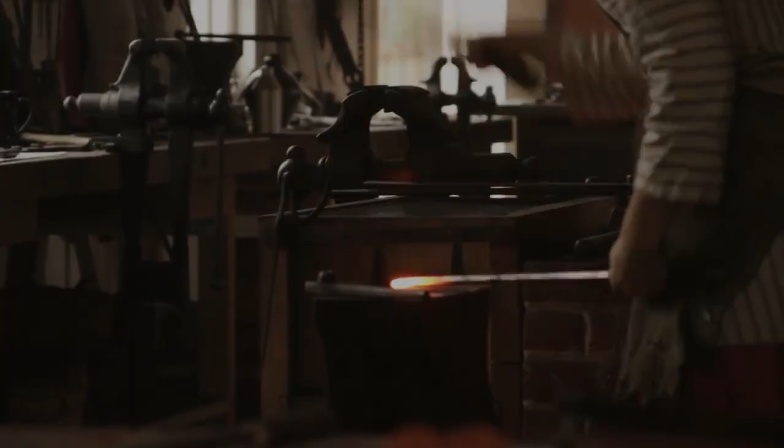Everything we build is dependent on these materials. They are so significant that we've named entire periods of human history after them, from the Stone Age to the Space Age. They have all been made possible by the materials we have at our disposal and our mastery over their properties. I've spoken about aluminium and silicon before, but today we're going to talk about one of the most influential periods in human history, the Iron Age.

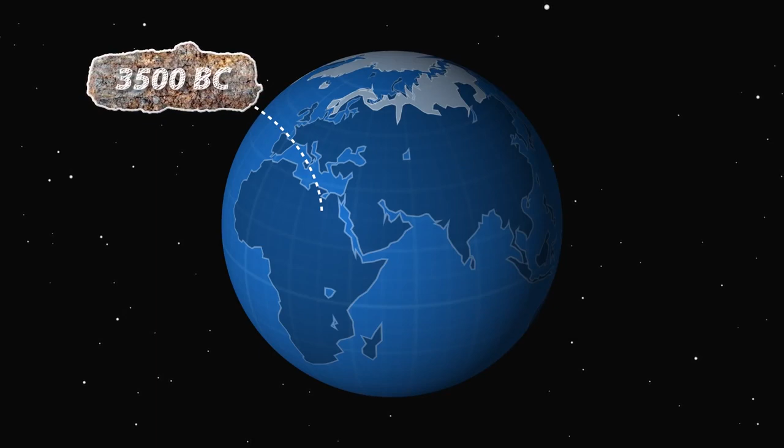Some of the earliest evidence of iron being used as a material goes back as far as 3500 BC in Egypt, where beads of iron taken from a meteor were found. Meteoric iron was a highly prized material due to its heavenly association. Tutankhamun was buried with a dagger made of the material.

Meteoric iron was the only naturally occurring source of iron at the time because iron reacts readily with oxygen to form iron ore. There is no oxygen in space, so meteors delivered this material to Earth in a form humans could use without having the technology to extract it from its ore.

The Iron Age began at various points across the world as humans started to learn how to extract iron from its ore, and its end date varies between regions too. In Britain, the Iron Age began in 800 BC and ended when the Romans invaded in 43 AD, marking the start of the Roman Age.

If we continue to define human history by the materials being mastered at that time, I would argue that the Iron Age lasted right up until a little over 150 years ago, when steel was first mass-produced.

Now, while this era is called the Iron Age, the best materials at the time were made from steel.

You may not have known, but iron and steel are mostly the same material.

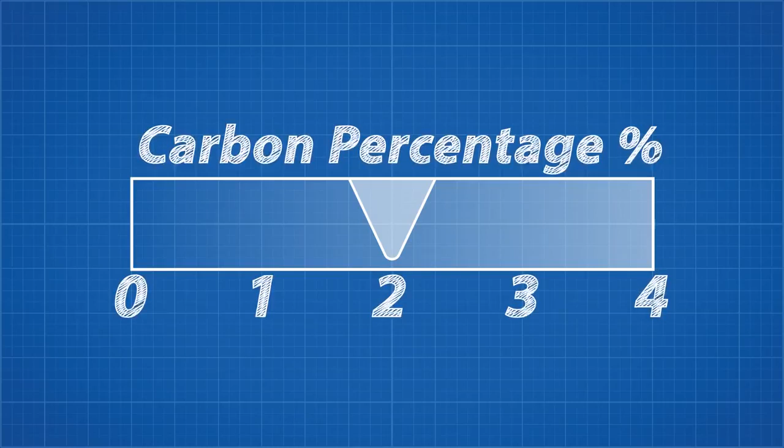So the main difference between iron and steel is the amount of carbon they contain. Anything with a carbon content above 2% is cast iron. In general, a higher carbon content results in a harder and less ductile material. Cast iron has a very high carbon content, which makes it very hard but also very brittle.

As iron started to become more popular, more and more of the early bronze cannons were replaced with cast iron, as it was cheap to manufacture and could be fired more often without being damaged. But these material properties meant that cast iron cannons had a tendency to explode with no warning, making them dangerous to operate. Cast iron is not suited for structural use either.

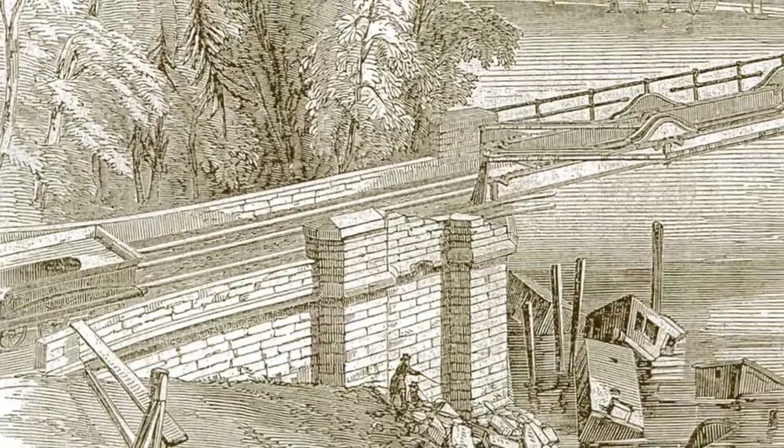In fact, its use in bridges in the mid-19th century led to a series of bridge collapses. Later, these bridges were rebuilt using wrought iron.

Wrought iron contains less than 0.08% carbon, which makes it a much better material for applications like this, as it is ductile, allowing it to bend under loads without breaking. But it has a low carbon content, which makes it a lot softer than cast iron.

Steel is between the two, with a carbon content between 0.08 and 2%, giving it an ideal balance between hardness and ductility. The history of iron is defined by our ability to control that carbon content.

Iron is the second most common metal on the surface of the Earth, just below aluminium, but it reacts with oxygen readily to form iron oxide ores. Rust is one form of iron oxide, and preventing it is a constant struggle in structural maintenance.

The Eiffel Tower has been painted 17 times since its construction to protect it from that corrosion. Every 7 years, about 60 tons of paint is applied to the Eiffel Tower, and the colour of paint has changed over the years.

The tower was originally a Venetian red, and has changed a few times from a more yellowish brown to a chestnut brown until the adoption of the current specially mixed Eiffel Tower brown in 1968.

Because iron reacts so readily with oxygen to form iron oxide, iron does not exist on the surface of the planet in a usable form. The first step to process iron is to remove that oxygen.

In the mid-Bronze Age, the first signs of production of iron are seen. Most of this early iron was smelted in furnaces called bloomeries. One of my favourite channels on YouTube, Primitive Technology, actually created a miniature version in one of his videos. These bloomeries heat the iron ore, using charcoal as a heat source.

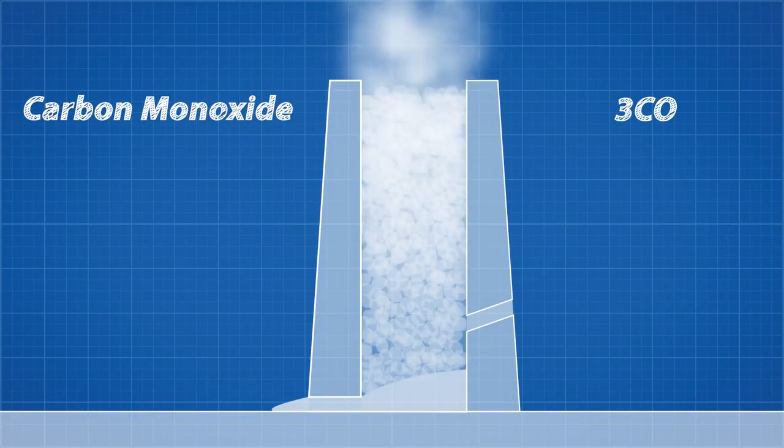The burning of charcoal produces carbon monoxide, which reacts with the iron oxide in the ore to form carbon dioxide and iron. The bloomery is heated above the melting point of the impurities but below the melting point of iron, and so, as the fire rages, material falls to the bottom of the bloomery and the heavier iron consolidates at the bottom.

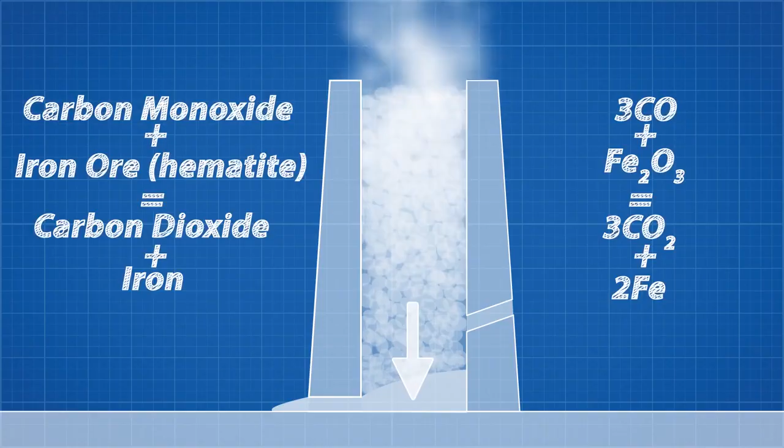The impurities form a molten pool called slag, which can be drained away. Another great channel on YouTube, How to Make Everything, made a series about this process.

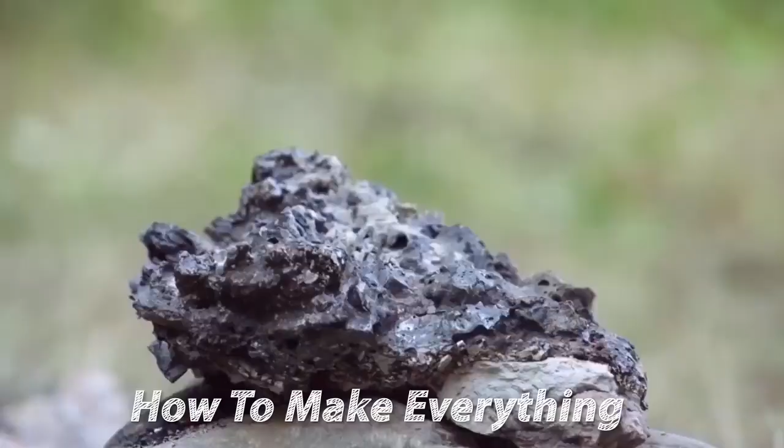When the iron is removed, it is in the form of a porous mixture of impurities and iron. It needs to be worked with a hammer to consolidate the iron, while the waste material is beaten off. The material left over is wrought iron, which has a very low carbon content.

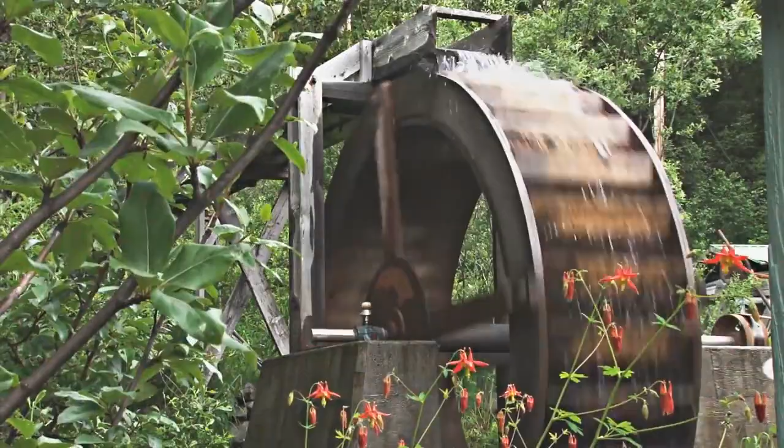These bloomeries produce very small quantities of iron, especially before the water wheel was introduced to drive the bellows, which allowed the bloomery to grow in size while keeping the temperature high enough.

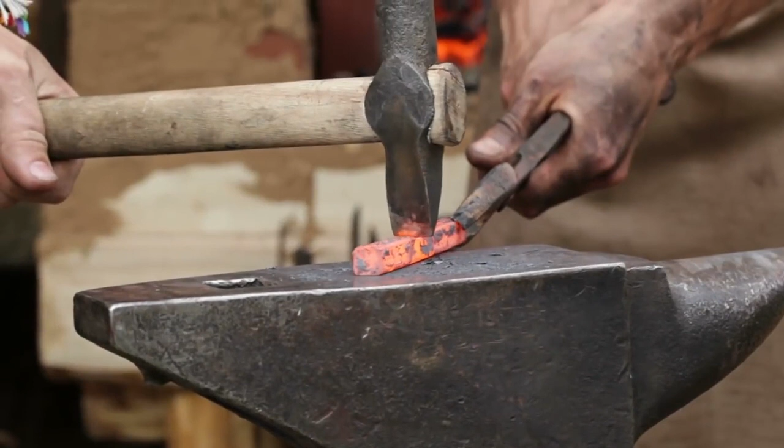Despite the small quantities it produced, the bloomery revolutionized human life, even beyond the obvious military advantages of iron weapons. Iron ore is much more common than the copper and tin that spurred the Bronze Age, allowing iron to be produced in many areas. These communities could make their own tools and weapons without importing material from abroad. Iron ploughs were stronger and heavier, allowing farmers to plough their land quicker and grow more food. A single farmer could feed more people, allowing more people to dedicate their lives to different trades.

Society was becoming more stratified and trade was increasing, and things began to accelerate even more as we discovered better ways of extracting iron, like the blast furnace.

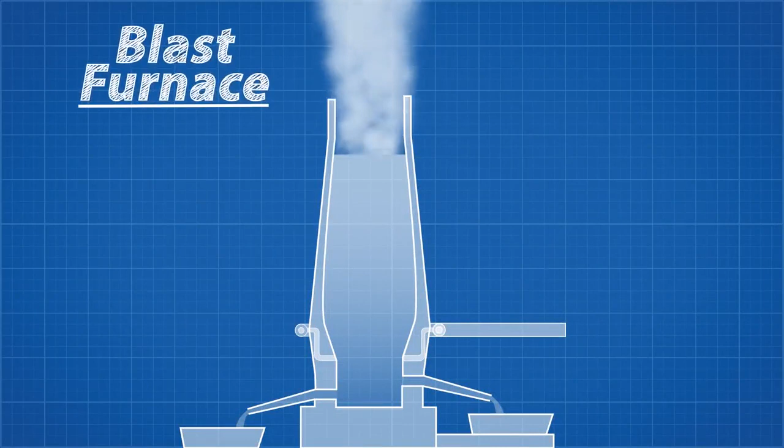Blast furnaces increased the production of iron dramatically. The blast furnace gets its name from the method used to heat it: preheated air at about 1000 degrees Celsius is blasted into the furnace through nozzles near its base.

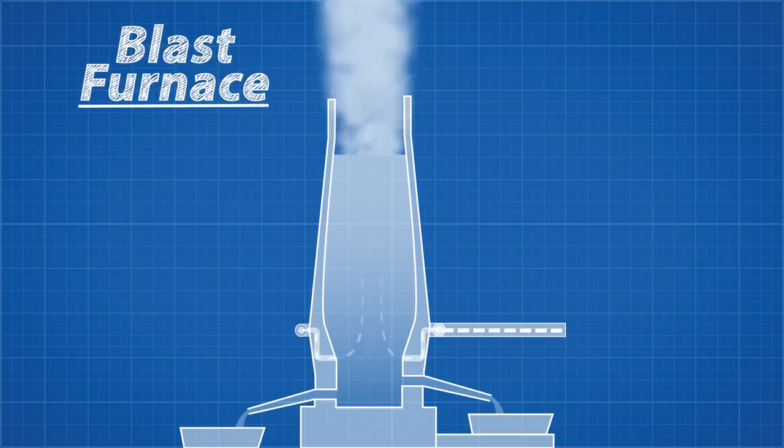Blast furnaces heat the iron above its melting point, along with flux materials. A flux is a chemical that combines with the impurities, allowing them to be extracted easily. In this case, the iron ore is mixed with limestone and coke.

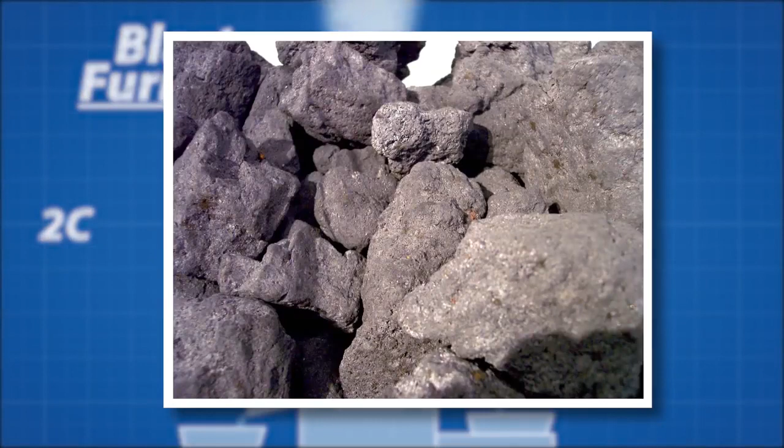Coke is a refined form of coal with very little impurities, and it works similar to the charcoal in bloomeries by producing carbon monoxide when burned, which reacts with the oxygen in the iron ore to remove it, as shown before. The heat from the process decomposes the limestone into calcium oxide and carbon dioxide.

The calcium oxide then reacts with the silica impurities in the ore to form calcium silicate. This, along with other impurities, forms a liquid layer of slag that floats on top of the heavy molten iron, which can be drained away, while the heavier molten iron is tapped lower down.

This method allowed vast quantities of ore to be converted to iron quickly, but it has a drawback. At higher temperatures, iron readily absorbs carbon, so the iron created in blast furnaces had a very high carbon content, making it cast iron. So an extra step is needed to decrease the carbon content.

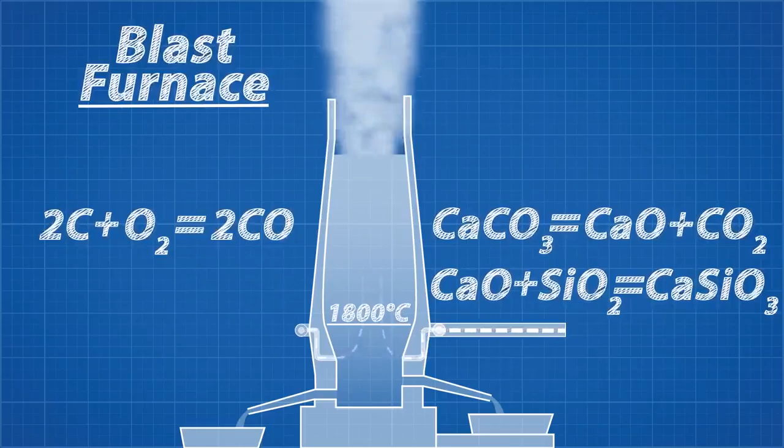This is called fining. There were a number of ways of doing this. One way was in a refinery, where the cast iron is heated back up, which oxidizes the carbon. The material would then be beaten with a hammer to knock the oxidized carbon out. This process would be repeated until wrought iron was produced once again.

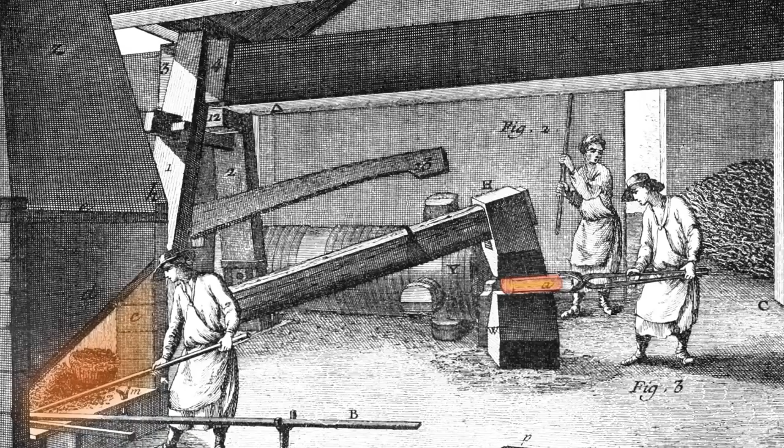Producing steel with this method would have required incredible skill, but there were methods of producing it in small quantities. One of these was crucible steel, produced by mixing wrought iron and cast iron in a sealed crucible, which prevented oxygen from the air from entering the material. When mixed, the low carbon wrought iron and the high carbon cast iron would form steel.

The puddling furnace was another method of production that involved heating the cast iron in a furnace that separated the fuel and the iron. The heat from the hearth would radiate through the furnace and liquefy the iron. As the iron became molten, a worker would stir it to encourage the oxidation of impurities.

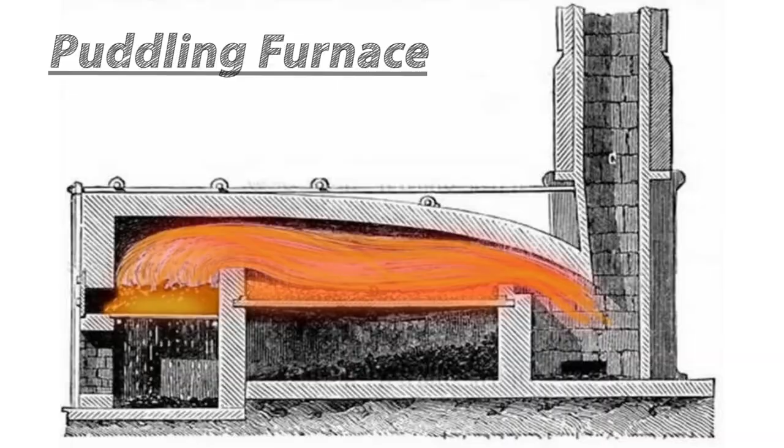All of these methods of production were fuel and labour intensive, making the end product too expensive for general industrial use. The average life expectancy of a puddling furnace worker was just 30 years old due to the toxic fumes produced. With the expansion of the railroads in the early 19th century, the pressure to develop a faster and cheaper method was growing.

Steel also has a superior strength over wrought iron, allowing it to carry more load. If you watch my last video, you'll know why this shape helps the rail carry even more load.

So you can see why finding a method of mass production was so important, and this is where the British metallurgist Sir Henry Bessemer came in. Bessemer designed a converter that looked like this.

Molten iron was poured in here from a blast furnace, and hot air is passed through the bottom. The oxygen in the air oxidizes the impurities in the iron. The carbon reacts to form carbon monoxide, which is expelled as a gas, while the silicon and manganese oxidize to form a layer of slag.

This process was very fast. In fact, early on it was a victim of its own efficiency, as it removed too much carbon and left too much oxygen in the iron. To combat this, another alloy containing iron, carbon and manganese, called Spiegeleisen, was added.

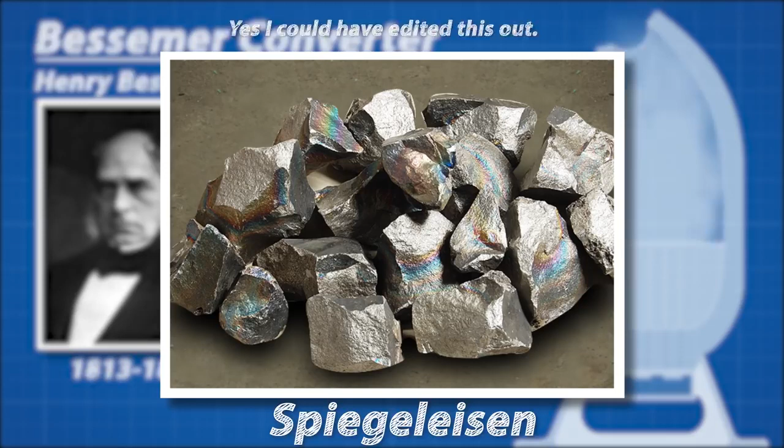The manganese would react with the oxygen to remove it, and the carbon increased the carbon content as needed. But it had another problem in the early days: the process did not remove phosphorus from the iron, and high concentrations of phosphorus make the steel brittle. Initially the Bessemer converter could only be used with iron from low-phosphorus ores, which were scarce and expensive. This was later solved by Welshman Sidney Gilchrist Thomas, who discovered that adding a chemically basic material like limestone to the process would draw the phosphorus into the slag. This availability of cheap steel caused an explosion in growth in the rail industry.

Without steel, our buildings could never have grown to the heights we see today, and bridges like the famous Golden Gate Bridge would have never been possible. There is even more to learn about steel's fascinating history, like how the expert blacksmiths of Japan managed to create the katana—they learned how to carefully control the crystalline structure of the steel to forge the perfect blade—but we'll talk about that in another video.